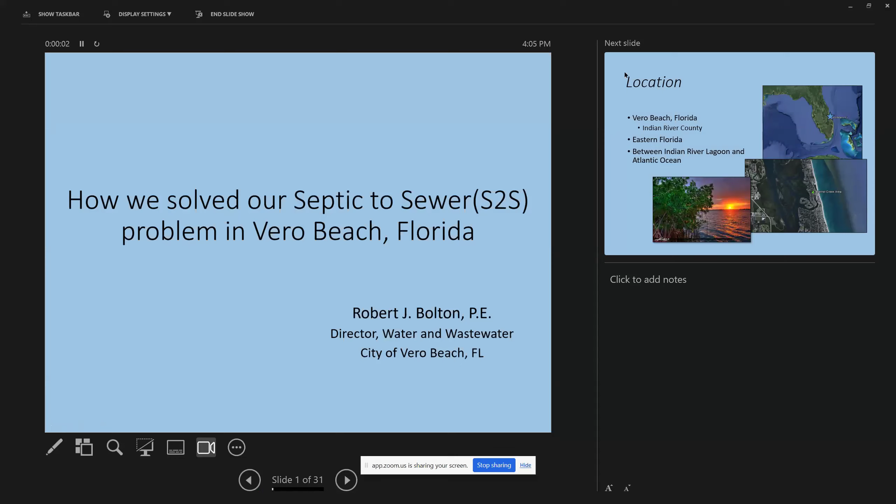And we are delighted to start with this because we're looking at decentralized systems that we think are going to be very, very important. Because on the spectrum, we have, on the one hand, big municipal systems that are very, very expensive, hundreds and hundreds of millions of dollars. Our new Sand Island wastewater treatment plant, just the renovation alone is approaching $2 billion for Honolulu.

And then on the other end of the spectrum, we have individual systems. And so the burden on that is for homeowners to come up with the price of converting their cesspools. And that can go anywhere from 25,000 on the lower range to 45, 50,000 on the higher range, and most people in Hawaii can't afford a big outlay like that. Financing, an issue that we'll cover in future webinars, is a potential solution.

But today we're talking with Rob because in Vero Beach, Florida, they dealt with similar issues with nitrate overloading, nutrient loading in their nearshore areas. With them, they have toxic algal blooms that are on the surface. Ours are a little more insidious in that you sometimes can't see them, and these are algal blooms on the coral reefs, which suffocate our coral reefs. And so there's been a lot of research on that, in Hawaii and across the country, with rising threats to our coral reef ecosystems.

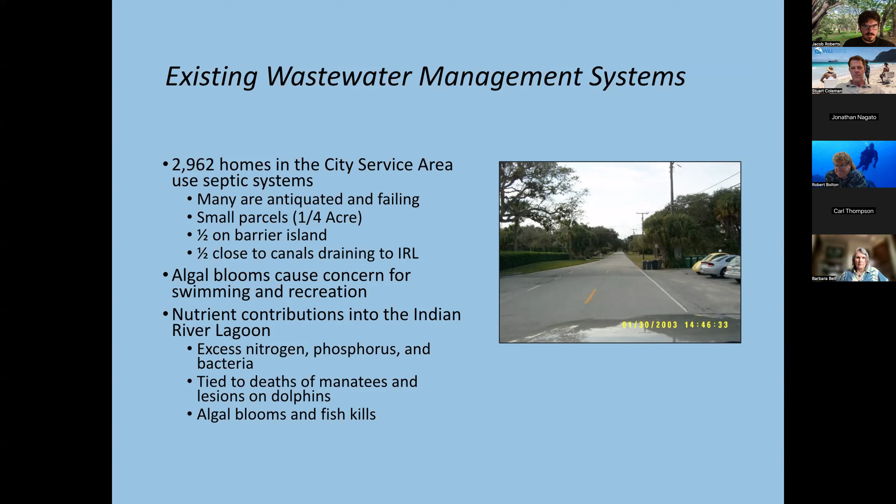So the county itself, we did a study and we started counting septic tanks. It took us probably 8 months to go in the areas because nobody had any of the data. And we found that there was roughly 30,000 septic tanks in Indian River County itself. And we were responsible for about 3,000. However, our 3,000 were right around the edges of the lagoon and had the largest impact. Next slide.

So the area of concern that we had was old, broken, failing systems, old concrete tanks dating back to the 1950s with cracks in them. The proximity to the lagoon, we have elevated water tables in some areas, and then we have barrier islands that have just nothing but beach sand, which is a direct conduit to the water table and to the lagoon.

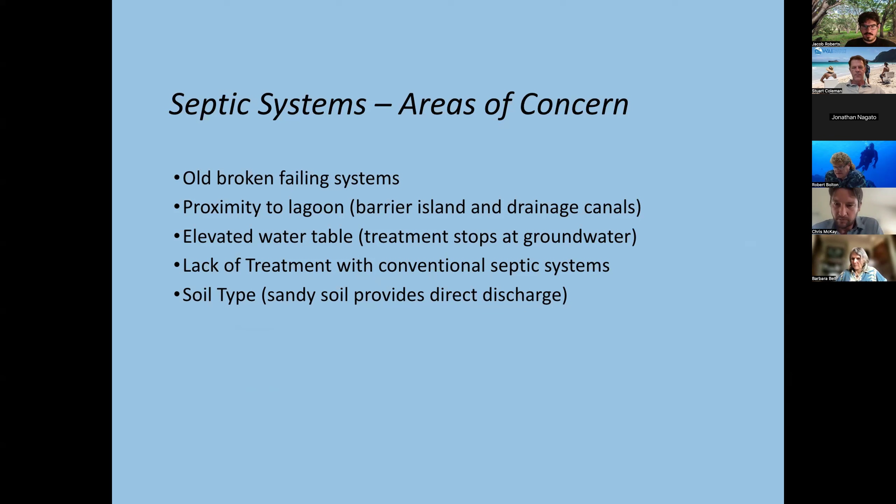There was a lack of treatment with conventional septic systems. Conventional systems probably only remove about 20% of the nutrients. We have soil, like I said, again, soil type where sandy soil provides direct discharge. Next slide.

So here's a typical cesspool. We don't necessarily have cesspools in Florida itself, but we do have them up and down the East Coast. I think that your concern in Hawaii is the amount of cesspools that you do have. They were banned in 2005. They are pretty much a direct conduit to the water table and to the different water bodies themselves because they're not really doing any treatment at all. Next slide.

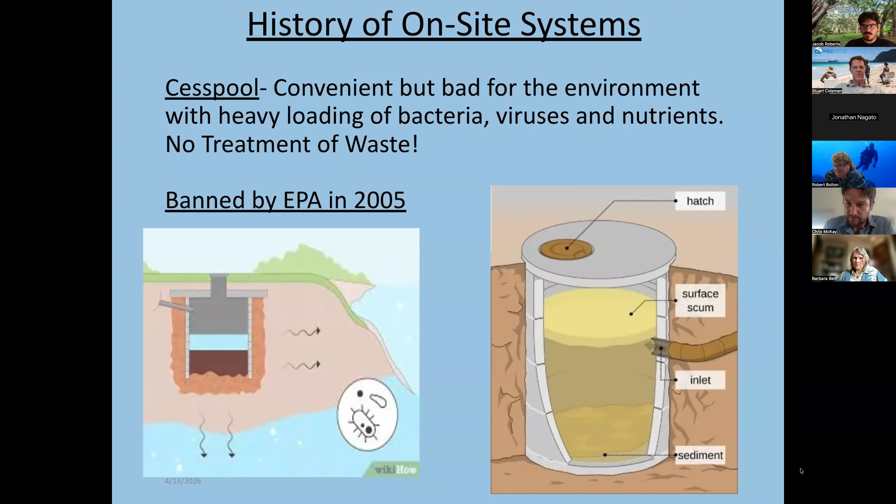In Florida, we have a more traditional septic system where at least you are removing bacteria and some viruses, but we still have a huge nutrient pollution. That is why the state of Florida in 2025 banned all new conventional septic systems. They are old conventional septic systems. All new septic systems that can be installed have to be nutrient reducing, which reduce a minimum of 60% nutrients. Next slide.

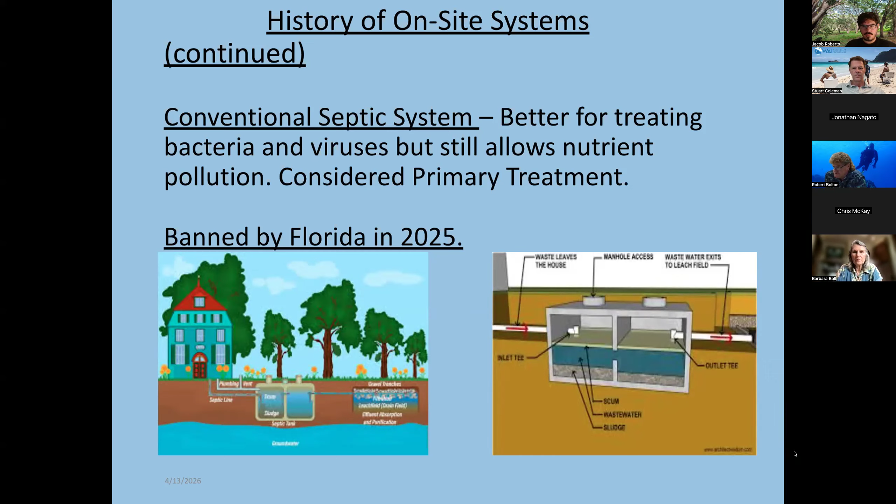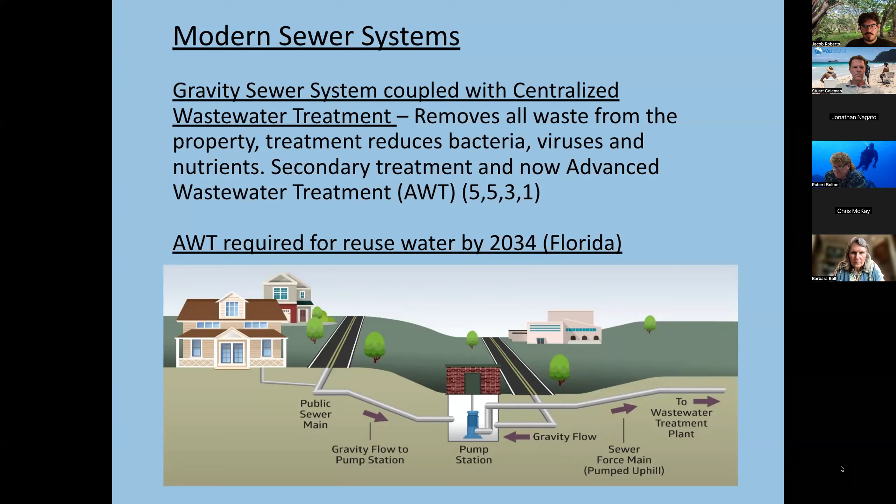So modern sewer was what we had 75% of. We're currently operating a very old, antiquated wastewater treatment plant. However, we're in the process of building a new advanced wastewater treatment plant that'll remove levels down to 5 BOD, 5 TSS, nitrogen levels of 3 and phosphorus levels of 1. And now AWT in the state of Florida, in 2024, they passed that anything within the Indian River Lagoon, if you're going to produce reclaimed water to folks, it has to meet AWT standards by 2034. Next slide.

So, what type of sewer and what options did we look at when we decided to go ahead and sewer the rest of the area that was on septic system? We looked at conventional gravity sewer that we were familiar with. However, it was the most expensive. It does have the lowest maintenance. It's affordable at the time of construction of subdivisions, but it's the most costly as a retrofit and the most disruptive to the residents when you're retrofitting a neighborhood.

We looked at vacuum systems. They were gaining popularity. However, they had higher maintenance costs than gravity sewer systems. They're normally not installed for new subdivisions. The retrofit cost was about 70 to 80% of gravity sewer systems. It was less construction disruption of neighborhoods. However, you need a minimum of, most people say, around 500 to 600 homes to make the pumping station viable from a cost standpoint if you're going to use that type of a project.

We looked at grinder systems. They were less popular than gravity sewer systems. They were used more than vacuum and STEP. However, they have the highest maintenance costs. Our staff were highly opposed to grinder systems just because of the additional maintenance. It is a common retrofit and has a low upfront cost. There's other communities in Florida using it, but the total cost was similar to a vacuum and a gravity sewer over time.

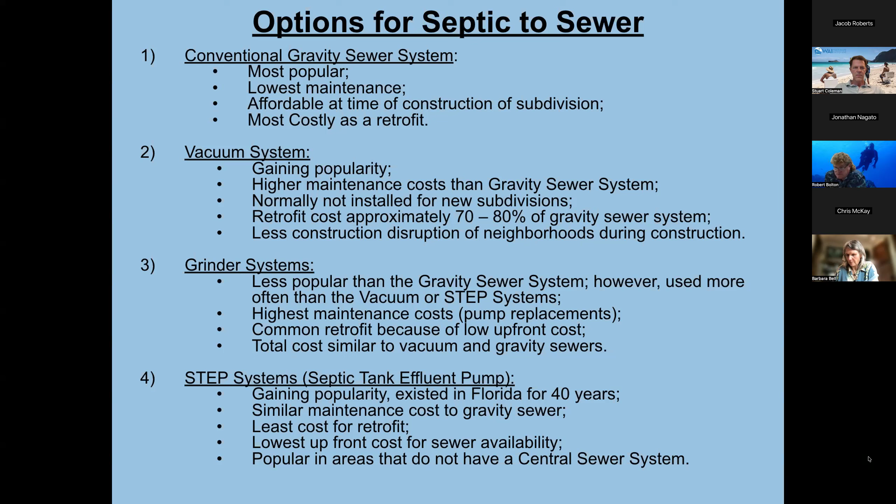We finally started looking at STEP systems. I had some familiarity from a previous city that I worked for. They had about 80 of them that were installed in the 1970s, 80s era. And when I was working there in 1990, they had very low maintenance costs. So that's where we started focusing. Next slide.

Our experience with gravity sewer as a retrofit: we did some projects in 2005. We had 60 homes that we connected. Cost back then, there were no lift stations involved, was roughly 6,000 to 20,000. Today, those costs, they're opening bids that are between 60 and $80,000.

In 2007, we had a grant, but we had to have 60% buy-in. We polled 900 residents to look at doing gravity sewer, and only 14% of the residents supported gravity sewer because of the disruption, the possibility of killing oak trees, and the cost. Next slide.

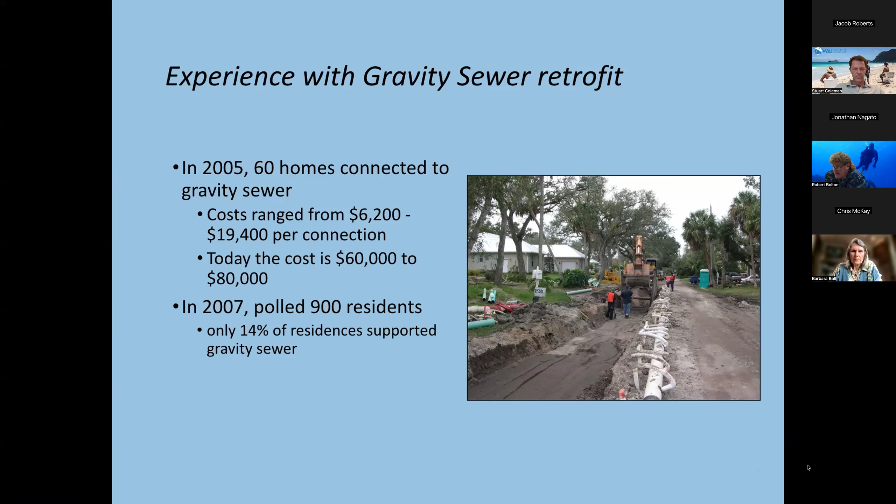You have a lot of citizen complaints. We received tons of them with this project. You have increased environmental impacts with runoff because you're tearing everything up. And you have emergency access concerns, so God forbid somebody has a heart attack and you need the fire department or emergency response teams and they're trying to get around large pieces of equipment. And the biggest thing that everybody was complaining about on our barrier island was damage to their trees, since we were a tree city. Next slide.

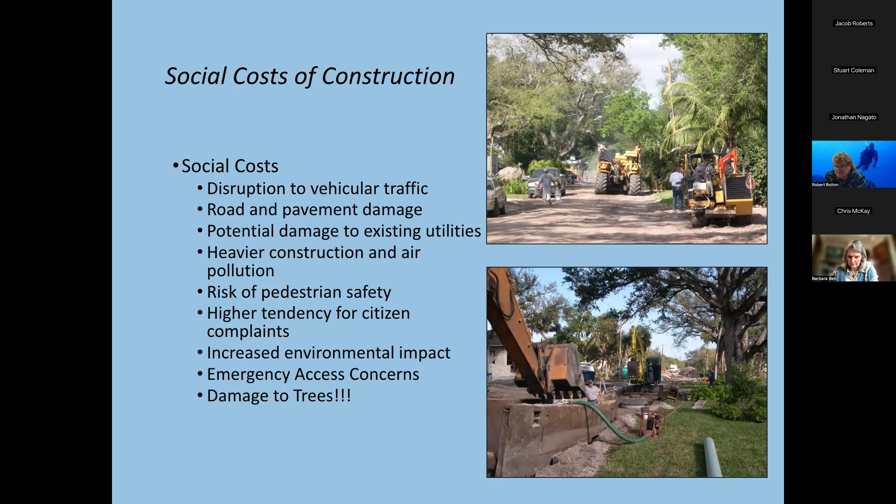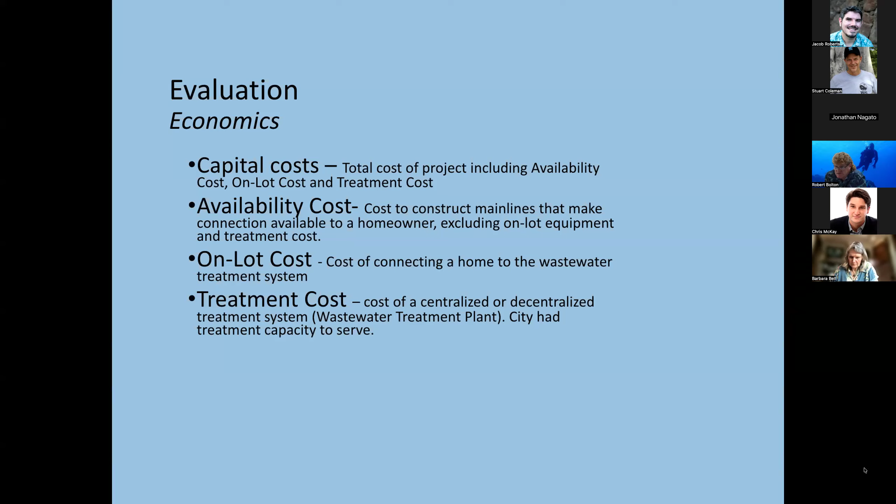You then have the treatment cost, which is the cost of either a centralized or decentralized treatment system to treat the waste coming off the properties. We had treatment capacity to serve, so therefore our treatment costs were just our typical impact fees that we were charging at the time. Next slide.

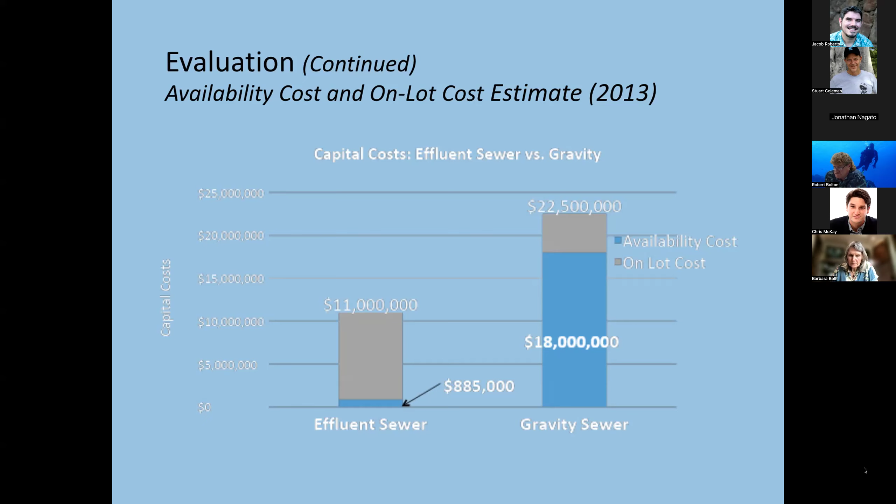So when we looked at the total cost, this is 2013 dollars, we were looking at that time at $11 million total cost for the on-lot cost and the availability cost for a STEP system. And we were looking at 22.5 million minimum for a gravity sewer system. I can tell you right now our costs for effluent sewer have doubled, but the cost for gravity sewer has tripled and quadrupled. Next slide.

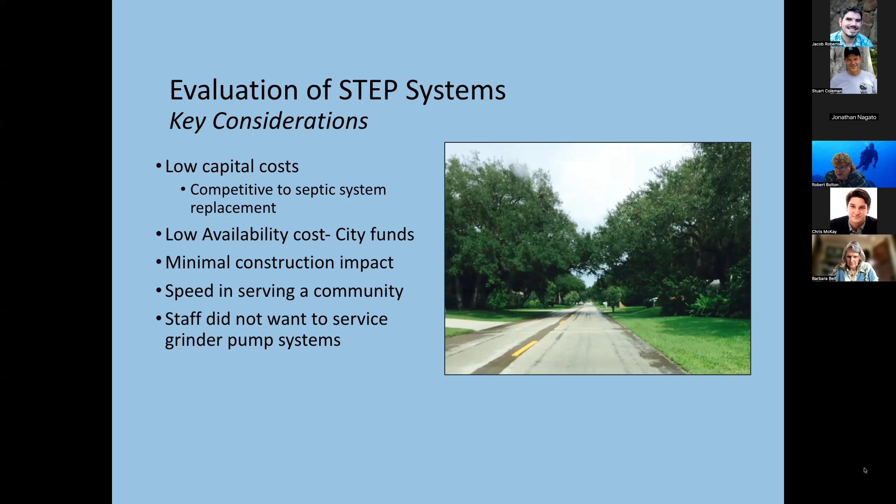We wanted minimal construction impact to the neighborhoods. We wanted speed in serving the community so that we got the lines out in a fairly quick period of time, since at that time it was non-mandatory, and we had failing septic systems. So instead of people spending money to repair their septic systems, they could connect to the city system. And again, the staff did not want to service grinder pump systems. Next slide.

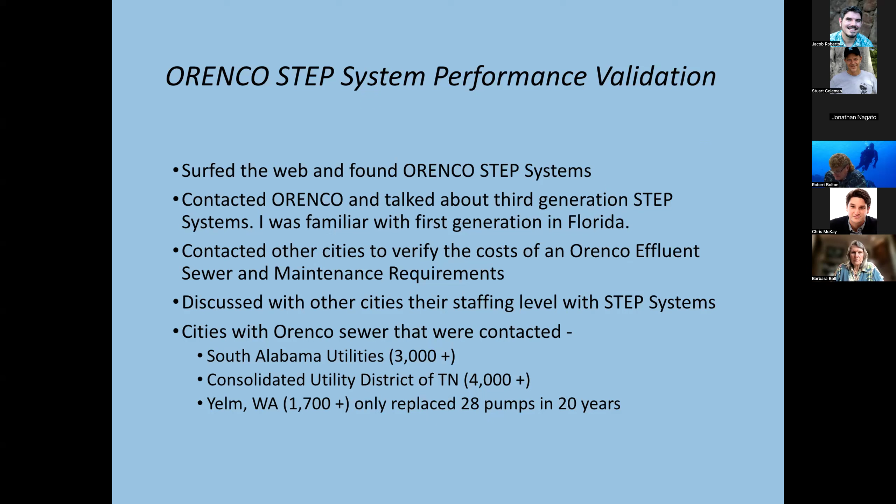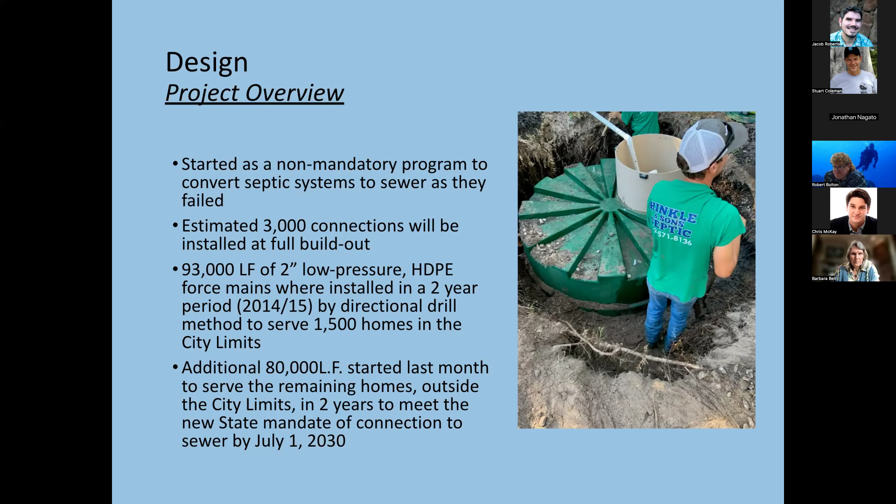So here is the Prelos model of an Orenco system. We first started with a 2-tank system. During COVID, we had problems with getting one of the tanks for our two-tank system. In the meantime, Orenco used to produce a fiberglass tank that was cost prohibitive to ship all the way across from Oregon to Florida. They started making the Prelos units that are a clamshell type design that we actually assemble once we get them here on site. And they're now the preferred installation by all the installers in the area because it cuts way back on time that they were normally spending on somebody's property.

So there's the Prelos 1000 and the 1500 step package. They come with a biotube. So if you look in the bottom corner where you see that little blue picture, this is the older model, but you can see down in the bottom there's filters. So all of the waste is filtered before it goes to the pump. The pump is actually a well pump, so they last a long, long time, hence why they can offer you a 10-year warranty on them, and Washington is seeing 2 to 3% failure rates after 20 something years.

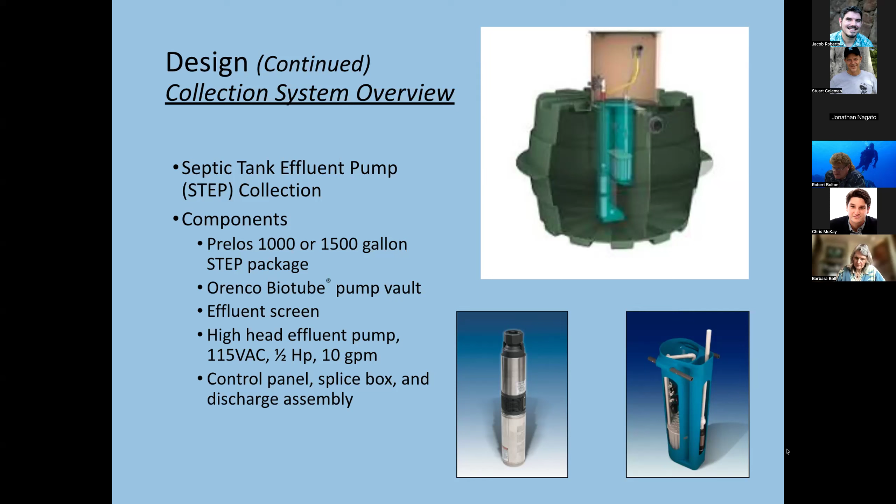We've worked with Orenco to modify their control panels. We actually have some backups in the control panels to where we can simply connect a small 3,000 watt generator to it and pump the system in case of power outages. You just open the panel, you flip a switch, and it starts to pump it down. Next slide, please.

So with benefits of the step system, the primary treatment occurs in the tank. There's about 85 to 95% removal of FOG. Tanks provide a minimum 24-hour emergency storage. We see probably 2 to 3 days. I mean, when you lose power after a hurricane, you're not living anymore, you're camping. So your water usage goes from about 100 gallons per person per day down to about 40.

We expect about an 8 to 9 year pump out with 95% confidence. Our first installation that we performed, we still have not pumped that system out yet. So it's living up to the 8 to 9 year projection that we had. Good thing about the Prelos, any abuses stay in the tank, meaning anybody that's flushing things down the toilet that shouldn't be flushed and clogs up a gravity sewer pump station, it stays in their tank and it backs their house up only. And it keeps the untreated septic tank effluent from getting into the groundwater and nearby water bodies like the Indian River Lagoon. Next slide.

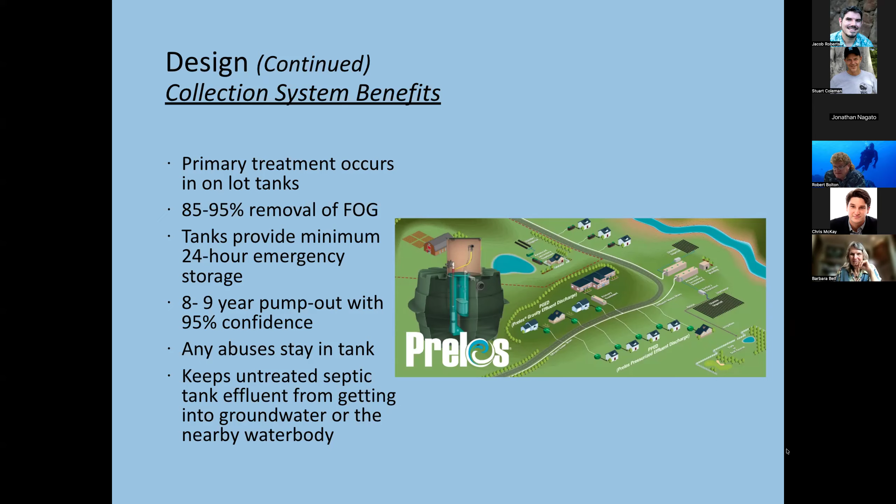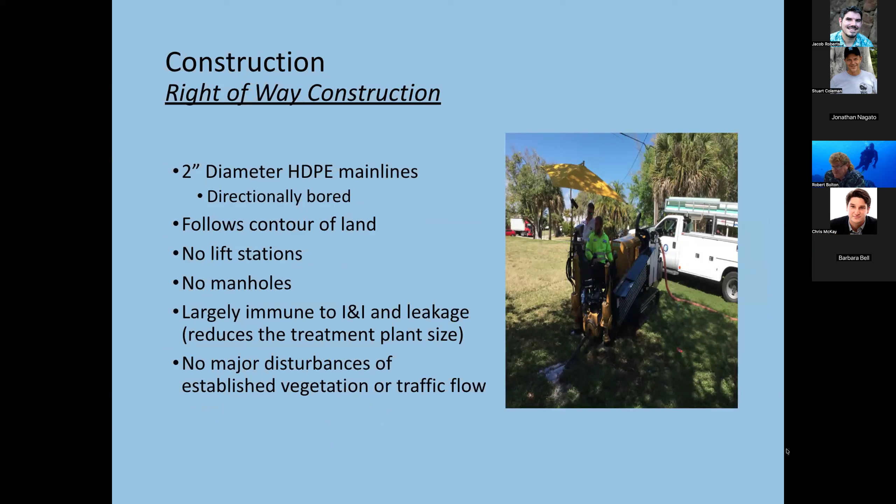So we started with installing 2-inch diameter mains. We follow the contour of the land. There's no lift stations. There's no manholes. It's largely immune to I&I. We use HDPE pipe, which is easy to fix. And there's no major disturbances to vegetation or traffic flow. Next slide.

This picture, if you look at the left, you see the green pipe right by the telephone pole. That's where the bore ended. But if you look all the way down by the stop sign and you see the orange cones, that's where they entered the pipe in. So we're able to do 3 500-foot runs at any given time.

The picture on the right is a double service. So we come up with the HDPE pipe and then we convert to PVC, which is then run on the lots to the STEP systems themselves. Next slide.

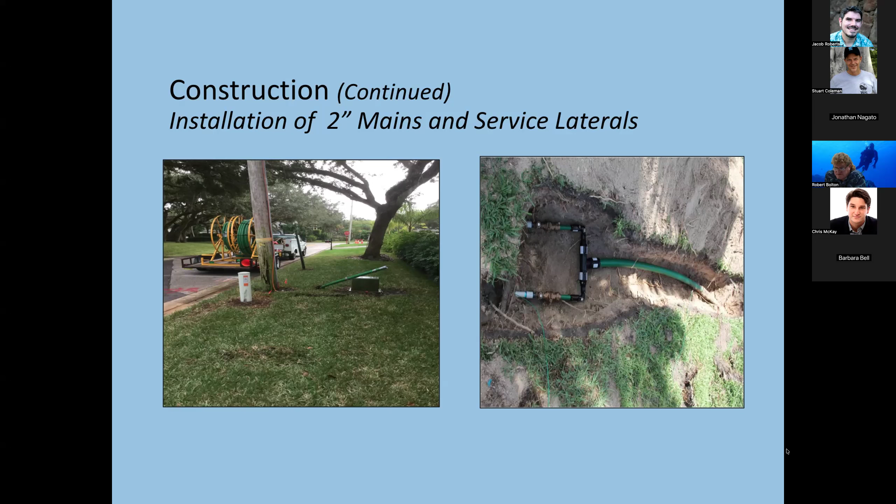So here's the on-lot construction. In this case, you're seeing in the top right a Prelos 1000 being installed. The next picture is our modified electrical panel. So the light in the center shows that the power is on to the unit. The green light on the top is when it's pumping, and the red light on the bottom is when there's something wrong and it alarms.

They go ahead and silence the alarm, and then there is usually a sticker on there that they call us and we will respond. We have elapsed time meters, we have heaters, all kinds of stuff in there that is not in their normal package. If anybody wants, I'll be glad to share what we've used. We haven't had one electrical panel failure yet in the 11 years that we've been operational.

In the bottom, you see more of the floats and the filters on the bottom left. And then there's a hanging discharge assembly where we can easily switch out a pump in less than 10 minutes. Next slide.

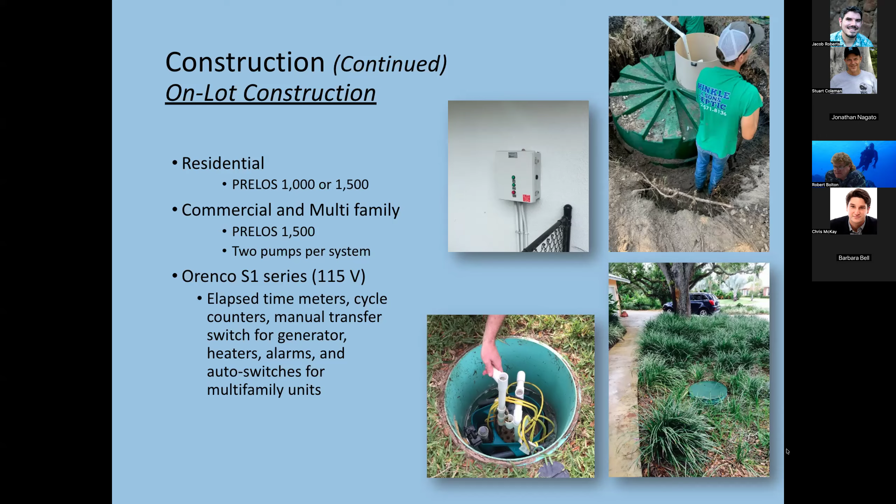Oh, this one got messed up a little, but here's your typical on-lot cost for a Prelos 1000. You have STEP equipment, the installation of the STEP system, the electrical connection, the pumping out of the tank and abandonment, and then restoration costs. We're seeing right now that typically a Prelos 1000, which will handle 3 bedrooms or less, is about 15,500 on-lot cost, and the 1500, which will handle 4 and 5 bedrooms, is roughly 16,700.

The new cost for service lines is running about $1,000 a connection, and the STEP main cost for the 2-inch outside in the street is running about $2,500. We decided to contract directly with smaller boring companies that are really subcontractors to general contractors, and we've been able to keep the pricing down that way, and it's working out real well.

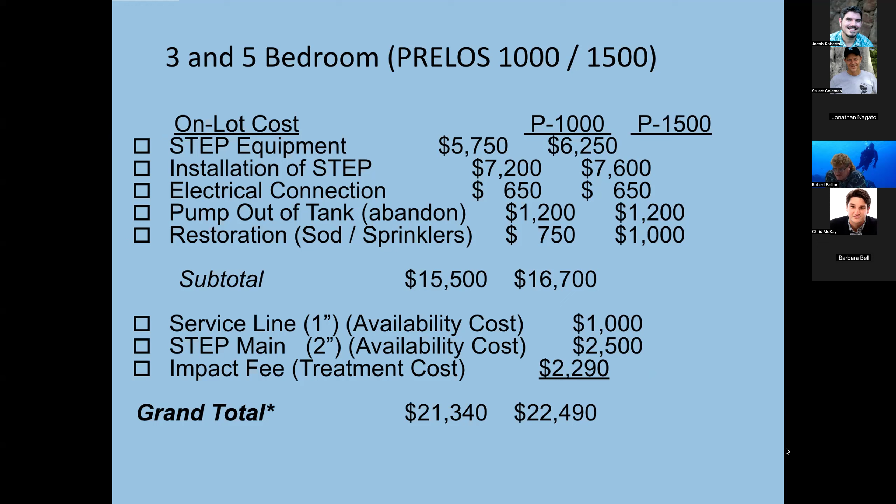Our impact fee, that's the treatment cost, is roughly $2,290. That's low compared to today. You would probably look at something that's 2 to 3 times that cost to actually construct a treatment system, whether it's a centralized or decentralized system. Next slide.

So the operation and maintenance of a STEP system, very simple. We were looking at 2 to 3 years, but we've actually gone about 4 years without really doing any maintenance on them. We did start doing maintenance this year, but really it's just a garden hose, cleaning the filter off to make sure that anything that has accumulated on the filter now passes back through to the pump. Exercising the valves on the STEP main, checking air release valves.

And then, like I said, the proactive on-lot O&M is tank effluent screen cleaning, pump control inspection, tank pump outs, float and pump maintenance, and then any type of scum and sludge measurements, and then pump out when necessary. Next slide.

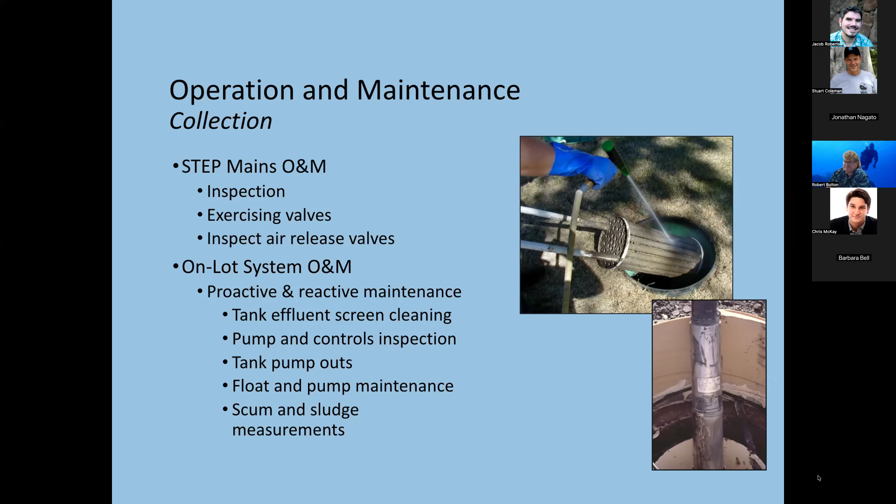So the project status to date: we started with 9 basins originally and provided STEP system connections to 1,538 properties. We ran the 93,000 linear feet in the 2-year period back in 2015 and 16. We've had over half the people connect voluntarily over the years, and now we started with the mandatory connection for the rest of those roughly 750 units.

We've designed the other 4 basins outside the city limits, but in our service territory. We've started the 80,000 linear feet of 2-inch main. We're estimated to finish that in December of next year. And we have a mandate inside the city limits for 2028 connection, and then the state mandates everything outside our city limits for 2030 connection.

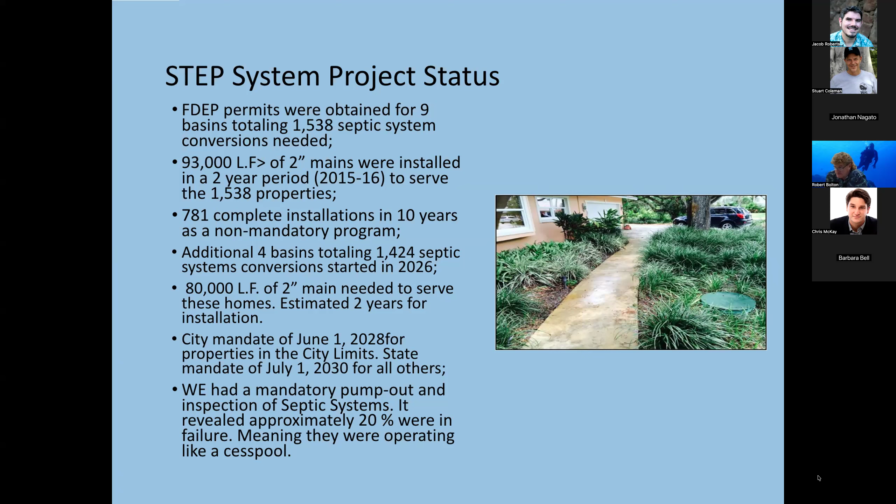We had a mandatory pump out and inspection of septic systems. It revealed that roughly 20% of the septic systems had broken septic tanks in failure, meaning that they were operating like a cesspool. Next slide. That's it. Any questions?